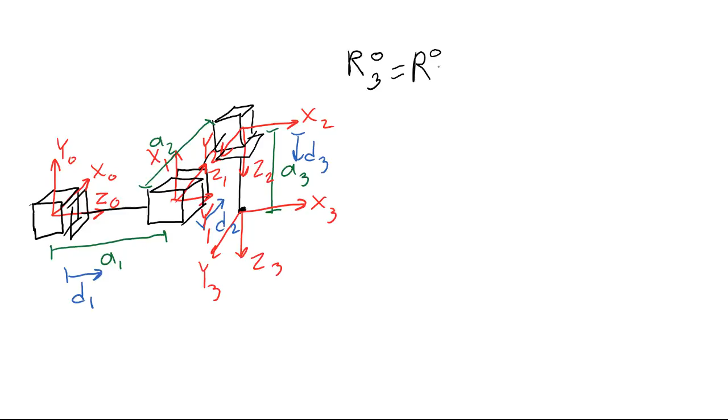Here, I'm showing you the kinematic diagram for the Cartesian manipulator. We want to find the rotation matrix R03. That is the rotation of the 3 frame in the 0 frame. We know that we can find this rotation matrix by finding each of the individual rotation matrices R01, R12, and R23, and then multiplying them together. Let's start by finding R01.

Each of these rotation matrices has 2 parts. The first part represents the rotation between frame 0 and frame 1 when the joint variable is 0. In other words, the way the manipulator appears in the kinematic diagram. So I need to figure out what rotation is showing here between the 0 frame and the 1 frame. There are 2 ways to do this.

The first way is to figure out some combination of rotations that will get the 0 frame to match the 1 frame. For example, if I rotate the 0 frame around its own z-axis 90 degrees, that will make the x0 axis point up, the same way that the x1 axis is pointing up. Then I could rotate around the new x0 axis 90 degrees to get z0 pointing into the page in the same way that z1 is pointing into the page.

I could then go and get the standard rotation matrix for a rotation around z and the standard rotation matrix for a rotation around x, plug in 90 degrees to both of them, and multiply them together. But there's also a shortcut way to do this. The shortcut way is using what we know about the meaning of a rotation matrix as the projection of the rotated frame on the original frame. I'll show you an example of what I mean here.

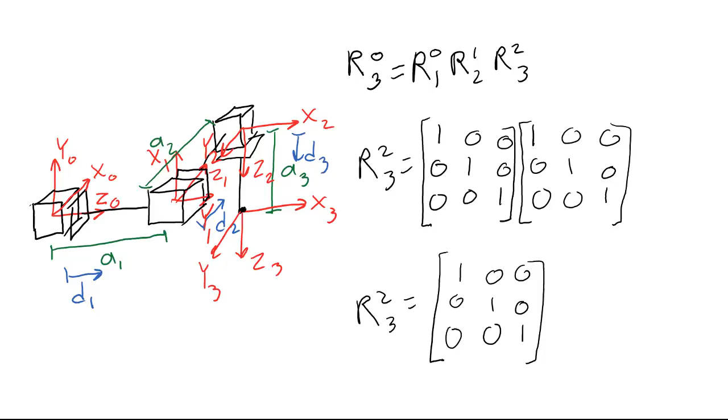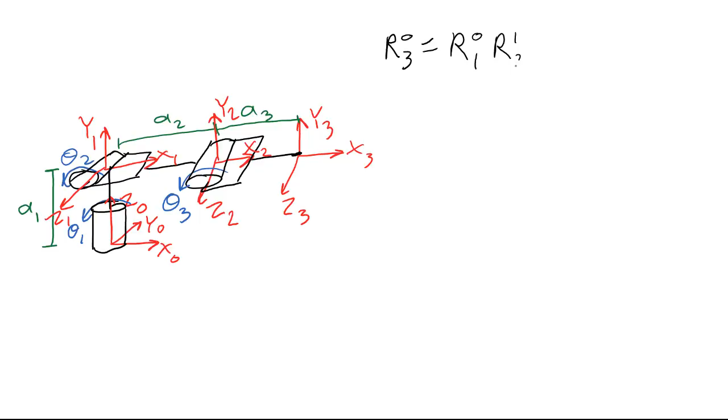Here's an example that will be much more interesting than the last one. This is the articulated manipulator. In general, the more revolute axes we have, the more interesting or complicated the rotation matrices will be. Once again, what we're trying to find is R03, the rotation of the end effector in the base frame. And we know that we can find that by multiplying together R01, R12, and R23. So we want to find each of these individual rotation matrices.

Let's start with R01. The first part of the matrix is the part that represents the rotation of frame 1 relative to frame 0 before the joint has moved. We can use the shortcut method to do this. x1 is in the same direction as x0. In other words, the projection of x1 on x0 is 1. So I find the position of this matrix that represents the projection of x1 on x0, and I put a 1 in that position. Since x1 is perpendicular to y0 and z0, I put zeros in those positions.

Next, y1 is in the same direction as z0. That means that the projection of y1 on z0 is 1. So I find the position that represents the projection of y1 on z0 and put a 1. Since y1 is perpendicular to x0 and y0, we get zeros in those positions.

Finally, z1 is in the same direction as negative y0. So the projection of z1 on y0 is negative 1. I put a negative 1 in the position that represents the projection of z1 on y0. Since z1 is perpendicular to z0 and x0, those two positions get zeros. And we're done with the first part of this matrix.

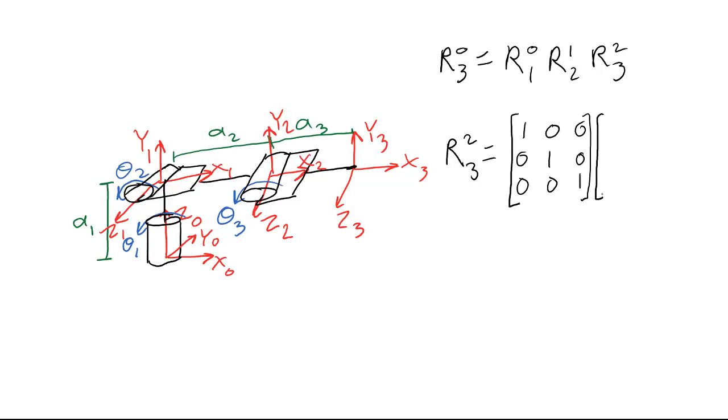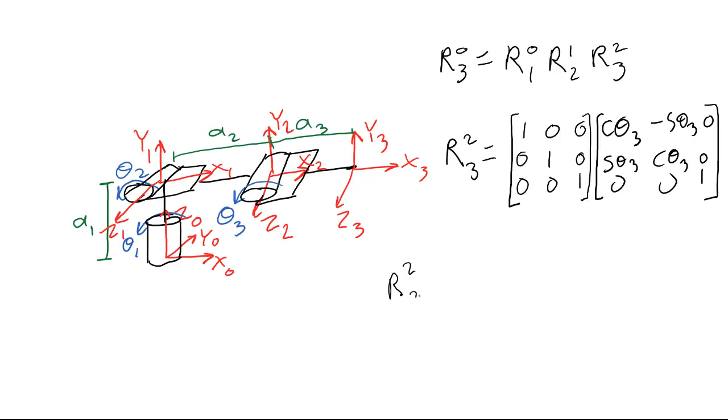Next, we have to get the part of the matrix for the rotation due to the joint variable. This is a rotation around Z2 or around Z3. It would be the same. So once again, I can either right multiply or left multiply this matrix. I'm just going to put it on the right since that's a little bit easier to write. I plug in the joint variable theta 3. I then multiply these two matrices together to get my complete R23 matrix.

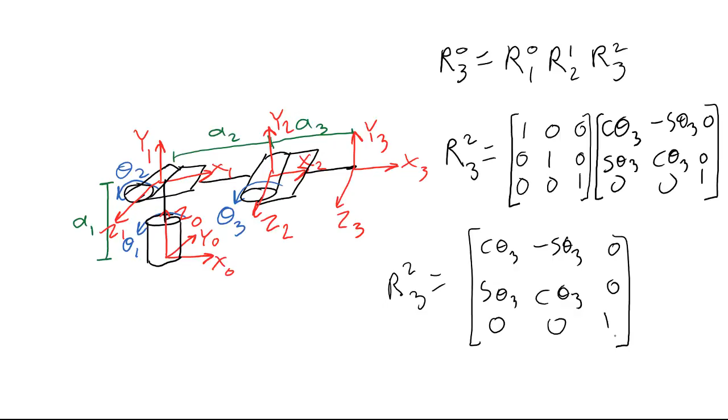Now that I've found R01, R12, and R23, I'm done with the rotation matrices for this kinematic diagram. I could now go put these three matrices into my Python code as I showed in the last video. So we'll move on to the next example. This next example is the spherical manipulator. Now I need to give you a little reminder about what happened when we were drawing this kinematic diagram.

Remember that we had to move the location of frame 2 back to be located on top of this second joint in order to follow Rule 3 of the rules for assigning frames to kinematic diagrams. So the purple frame 2 in this picture is the correct frame 2. The red one was the one we drew initially. We'll be using the purple frame 2 from now on for deriving our rotation matrix and also for doing our displacement vector in the next videos. Let's start by finding R01.

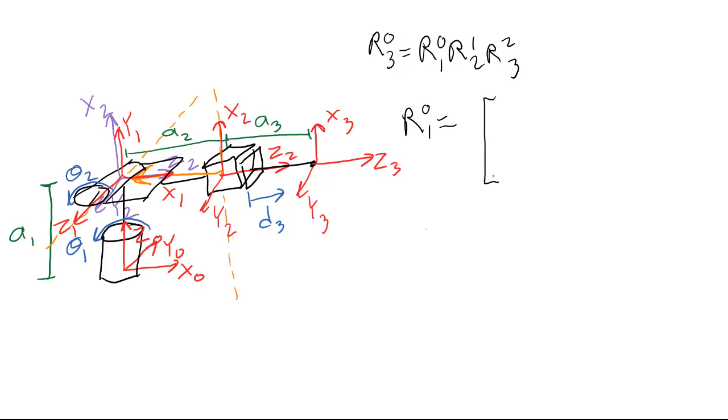We'll first do the part of the matrix that represents how frame 1 is rotated relative to frame 0 now before theta 1 has moved at all. x1 is in the same direction as x0. So the projection of x1 on x0 is 1. Since x1 is perpendicular to y0 and z0, those numbers will be 0. y1 is in the same direction as z0. So the projection of y1 on z0 is 1. And it's perpendicular to the other axes.

z1 is in the same direction as negative y0. So the projection of z1 on y0 is negative 1, and the other elements are 0. Now we have to write the part of the rotation matrix that is due to the joint variable. Theta 1 is a rotation around z0, or it's a rotation around y1.

So we have to either go get the standard form of the rotation matrix around y or the rotation matrix around z. If we want to use the rotation matrix around z, it has to go on the left. And if we use the rotation around y, it has to go on the right. Since last time we encountered this, I got the y matrix and multiplied on the right. This time I'll do it the other way around. I'll go get the z matrix and multiply it on the left.

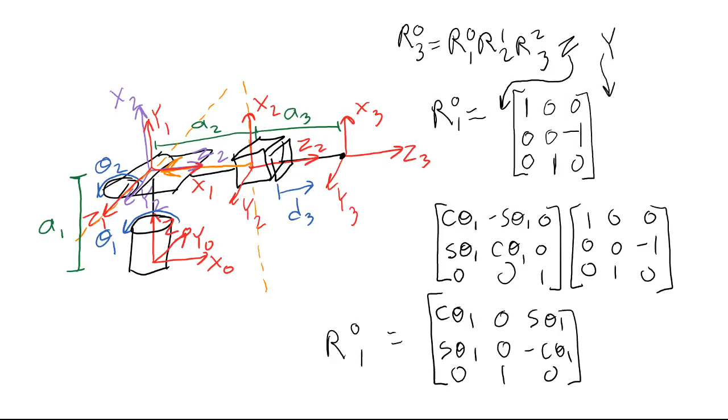When I multiply these two matrices together, I get the following. If you go back in the video to the last time we made this decision and we put the y matrix on the right, you'll see that the answer that we got is exactly the same now as what we got last time when we did y on the right. We'll move on now to R12.

Remember that here we're comparing the 1 frame in red to the 2 frame in purple. We'll start out by writing the part of this matrix that tells us how frame 2 is rotated relative to frame 1 right now. X2 is in the same direction as Y1. Y2 is in the same direction as Z1. And Z2 is in the same direction as X1.

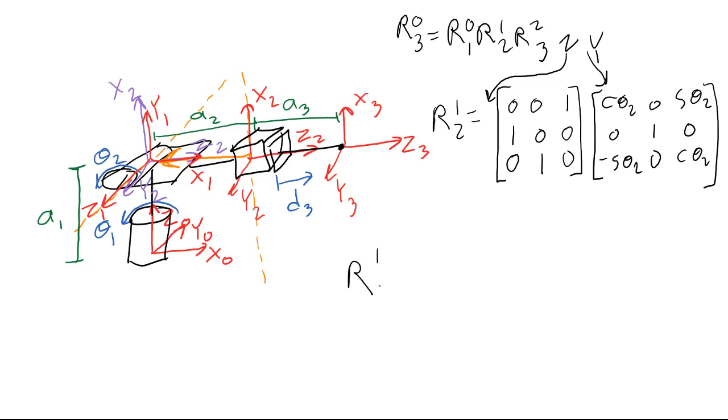Now, the rotation theta 2 is around Z1, or it's around the axis Y2. So again, we can either left multiply by Z, or we can right multiply by Y. This time, I'll right multiply by Y. I go and get the standard form of a rotation matrix around Y, and I plug in the variable theta 2. I then multiply these matrices together. And that is the complete R12. Let's do R23.

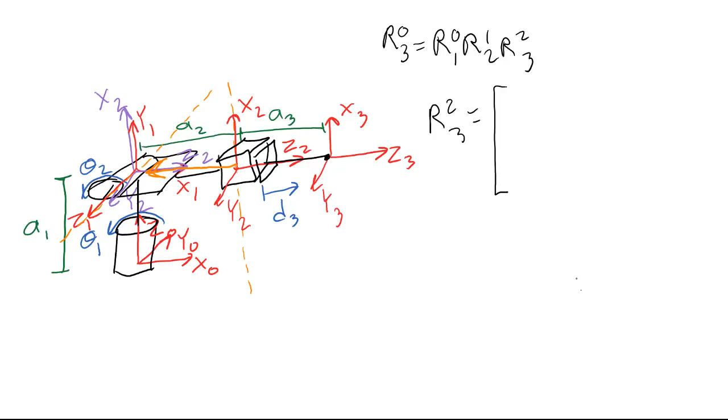Frame 3 is in exactly the same orientation as frame 2. That means that the first part of the rotation matrix will be the identity matrix. Also, the third joint is a prismatic joint, and prismatic joints do not give us any rotation due to the joint variable. That means that the second part of this rotation matrix is also the identity matrix. When I multiply the identity matrix by the identity matrix, what I get out is again the identity matrix. So this is my complete R23, and I'm done with this example.

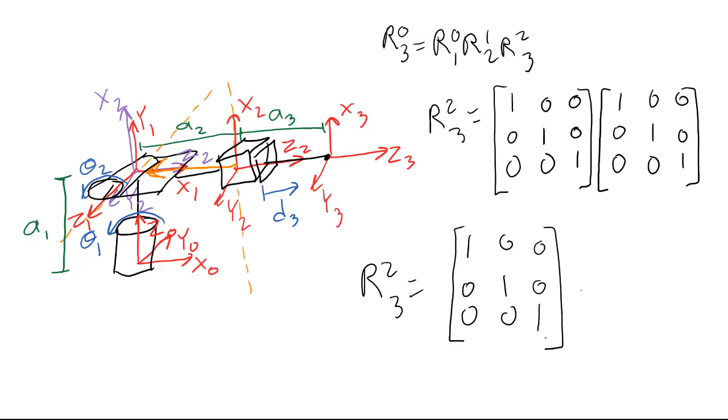Here's our last example, the cylindrical manipulator. We'll start with the part of the rotation matrix that tells us how frame 1 is rotated relative to frame 0, not due to theta 1. These two frames are in the same orientation right now, so this part of the matrix is the identity matrix. Next, we need the part of the rotation matrix that is due to theta 1. Theta 1 is a rotation either around Z0 or around Z1.

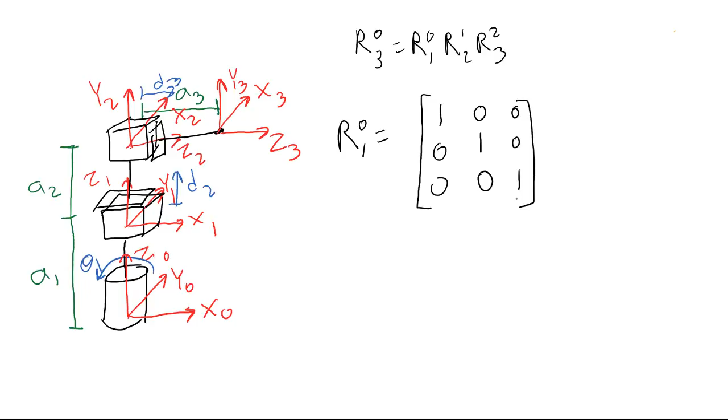In both cases, it's a rotation around Z, so I can either left multiply or right multiply by the Z rotation matrix. I'll put it on the right just because I have more room to write there. When I multiply by the identity matrix, the other matrix doesn't change, just as if I were multiplying by 1, and I'm done with R01.

On to R12. We start with the part of the matrix that tells me how frame 2 is rotated relative to frame 1 right now. X2 is in the same direction as Y1. Y2 is in the same direction as Z1. And Z2 is in the same direction as X1.

Now, the next part of this matrix is the rotation that is for the joint variable. But since I have a prismatic joint, there will be no rotation due to the joint variable. So I need to multiply this matrix by the identity matrix. But I know that any time I multiply a matrix times the identity matrix, the matrix doesn't change. So I'm actually finished already with R12, and I'll go ahead and stop here. Now let's do the rotation R23.

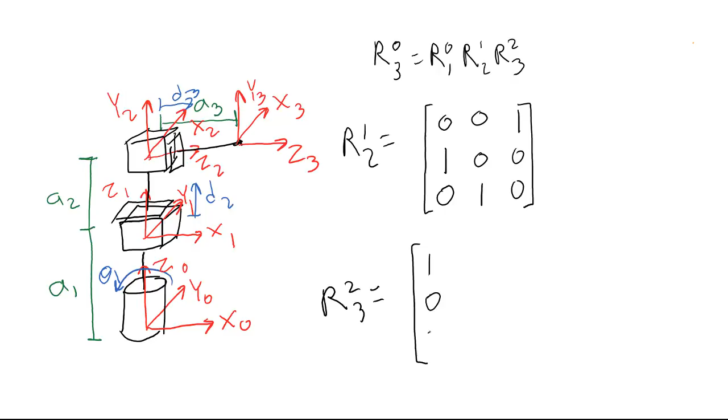I'll first do the part of the matrix that tells me how frame 3 is rotated relative to frame 2 right now. These two frames are rotated exactly the same way right now, so that part of the matrix is the identity matrix. Also, this joint is a prismatic joint, so there's no rotation due to the joint variable either. That means that I'm actually done with R23 also.

We've now seen a bunch of examples of finding the rotation matrices for different kinds of manipulators. The rotation matrices tell us how the end effector is rotated or oriented relative to the base frame. We know that rotation is not the only way that the end effector can change. It can also change its position. In the next videos, we'll be looking at how the end effector changes its position as the joint variables change their values.